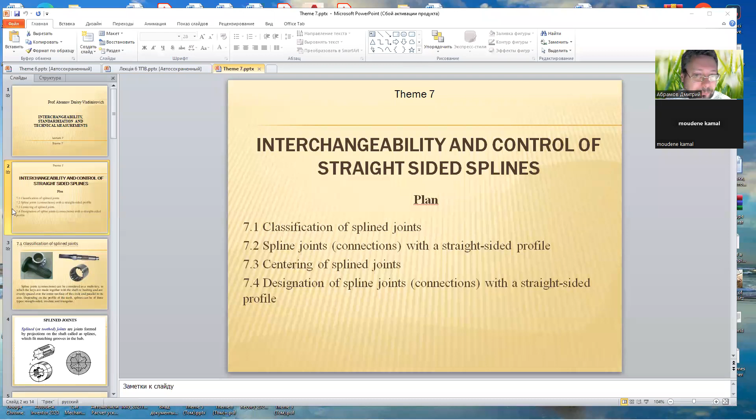Now we start item 7.1, classification of splined joints. What are splined joints? Spline joints or connections can be considered as multi-key connections in which the keys are made together with the shaft or bushing and are evenly spaced over the entire surface of the circle and parallel to its axis. Depending on the profile of the teeth, splines can be of three types: straight-sided, involute, and triangular.

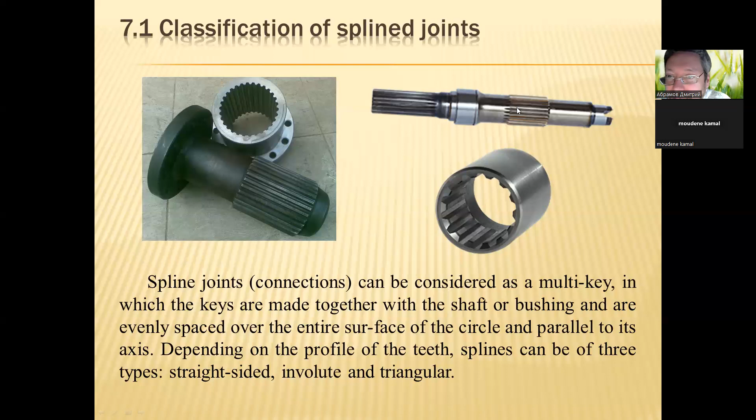In these figures, you can see the splines with straight-sided teeth. So, splined joints. Splined or toothed joints are joints formed by projections on the shaft called splines, which fit matching grooves in the hub. Please write down to your notes what the splined joints are. One more time, splined joints are joints formed by projections on the shaft called splines, which fit matching grooves in the hub. One, it's a shaft, and two, it's the hub.

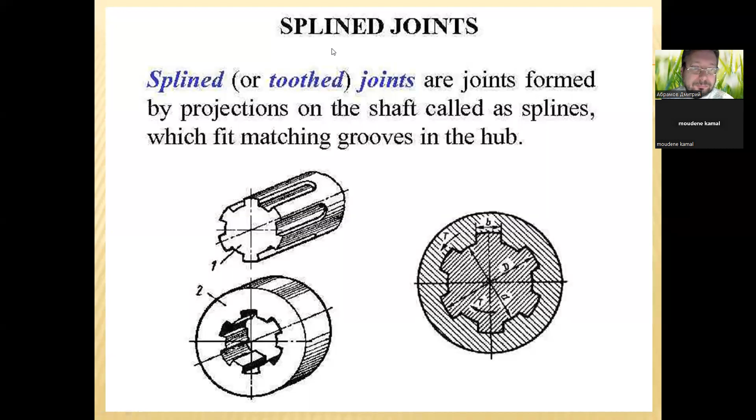Classification of splined joints according to the shape of splines. Joint with straight-sided splines. You can see this type in figure 1. Next type of splines is the joint with involute splines. You can see the teeth of these splines have an involute form, like a gear. And joint with triangular tooth splines. The teeth of the spline are like a triangle.

So write down to your notes these 3 types of splines, and write down to your notes 3 figures with different types of splines, of spline joints. And according to the depth and number of splines, the splines can be light series, medium series, and heavy series.

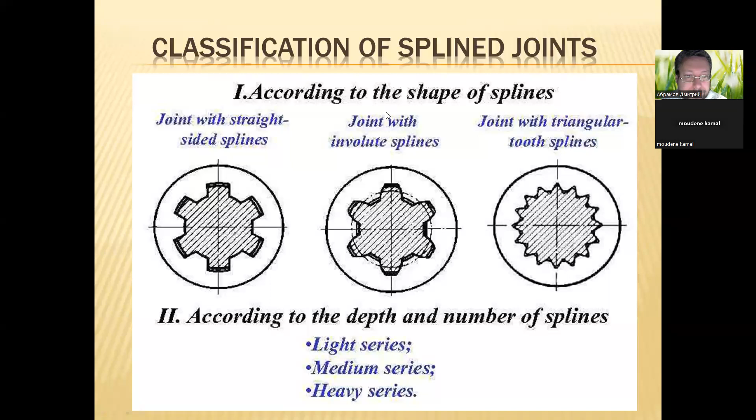Internal and external spline teeth. The tool machines and extensive hobbing and cutting tools available to us allow us to achieve external and internal spline connections according to the standards NBN, DIN, BS, AGMA, or NF on blanks, of which the dimensions fall within the limits of our manufacturing capabilities. This applies both to spline connections with involute flanks and to spline connections with straight flanks. You can see internal diameter of the spline connection, external diameter of the spline connection, and width of the tooth. Internal diameter is D1, external diameter D2, and width is B.

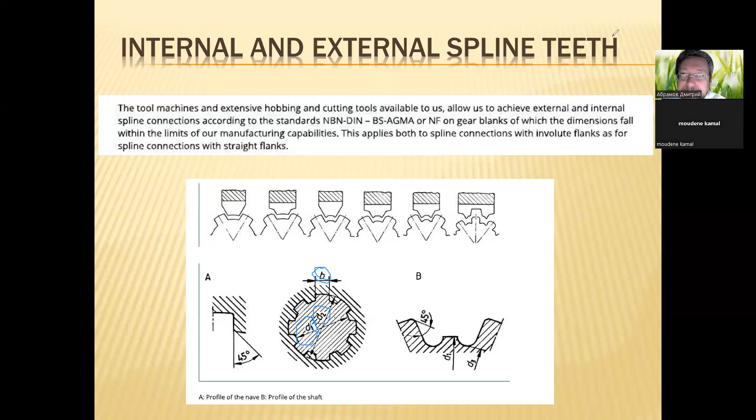Splined joints. Advantages. Splined joints offer a higher load carrying capacity owing to an increased contact area. They permit better alignment of the mating parts. Stress concentration is less pronounced at the roots of the splines than in keyways. Splined joints are easier to manufacture. They can be made to a higher degree of accuracy.

Please write down to your notes the advantages of splined joints. Splined joints compared to keyed ones transmit more torque, have greater endurance strength, and higher centering accuracy.

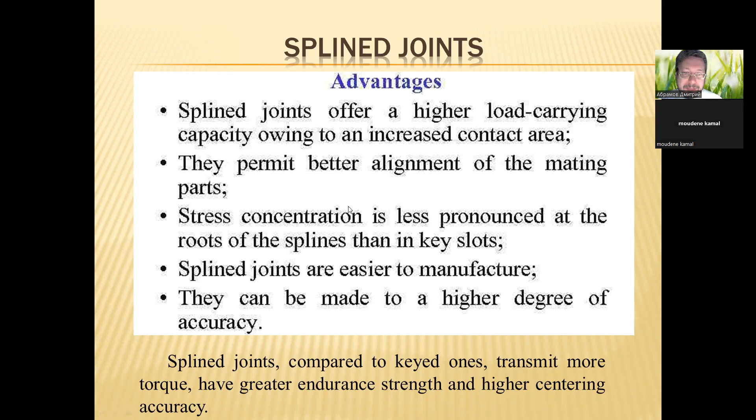Next slide. Yeah, another 1 minute, teacher, please. Okay, okay. Before we start the item number 7.2, let's watch some video about spline connections.

Splines are ridges or teeth on a drive shaft that mesh with grooves in a mating piece and transfer torque to it, maintaining the angular correspondence between them. For instance, a gear mounted on a shaft might use a male spline on the shaft that matches the female spline on the gear. The splines on the pictured drive shaft match with the female splines in the center of the clutch plate, while the smooth tip of the axle is supported in the pilot bearing in the flywheel. An alternative to splines is a keyway and key. though splines provide a longer fatigue life.

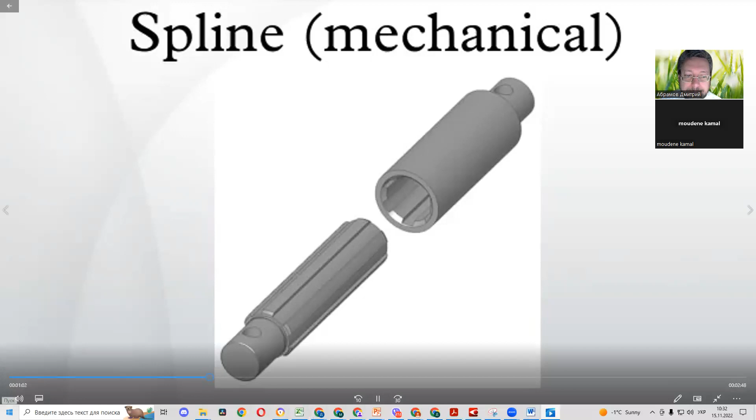Types. There are several types of splines. Parallel key spline, where the sides of the equally spaced grooves are parallel in both directions, radial and axial. Involute spline, where the sides of the equally spaced grooves are involute, as with an involute gear, but not as tall. The curves increase strength by decreasing stress concentration. Crown spline, where the sides of the equally spaced grooves are usually involute, but the male teeth are modified to allow for misalignment. Serrations, where the sides of the equally spaced grooves form a V.

These are used on small diameter shafts. Helical splines, where the equally spaced grooves form a helix about the shaft. The sides may be parallel or involute.

This can either minimize stress concentrations for a stationary joint under high load, or allow for rotary and linear motion between the parts. Ball splines, where the teeth of the outer part are implemented with a ball bearing to allow for free linear motion even under high torque.

Uses: Drive shafts on vehicles and power takeoffs use splines to transmit torque and rotation and allow for changes in length. Splines are used in several places on bicycles. The crank-arm to BB shaft interfaces that are splined include ISIS drive, Truvativ GXP and Howitzer, Shimano's Octalink, and many others, most of which are proprietary.

Some cranksets feature modular spiders, where torque is transmitted through splines. Cassettes engage the free hub via a spline that is one groove wider than the others to enforce a fixed orientation. Disc brake mounting interfaces that are splined include Centerlock, by Shimano.

Aircraft engines may have a spline upon which mounts the propeller. There may be a master spline which is wider than the others, so that the propeller may go on at only one orientation, to maintain dynamic balance. This arrangement is commonly found in larger engines, whereas smaller engines typically use a pattern of threaded fasteners instead.

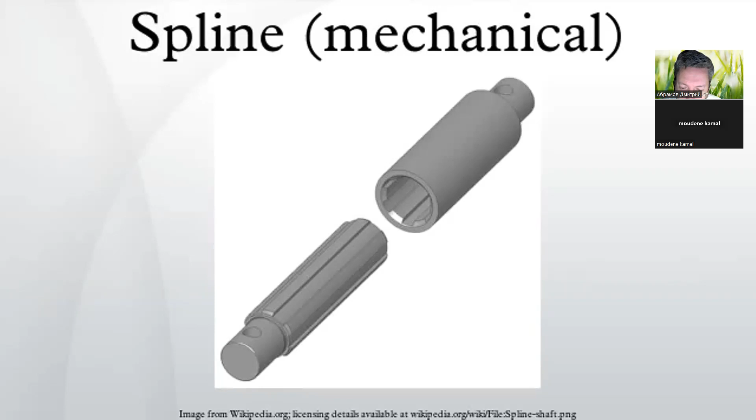References. Further reading: Robert Rich Robbins, Tooth Engagement Evaluation of Involute Spline Couplings, Brigham Young University. Retrieved July 8, 2010.

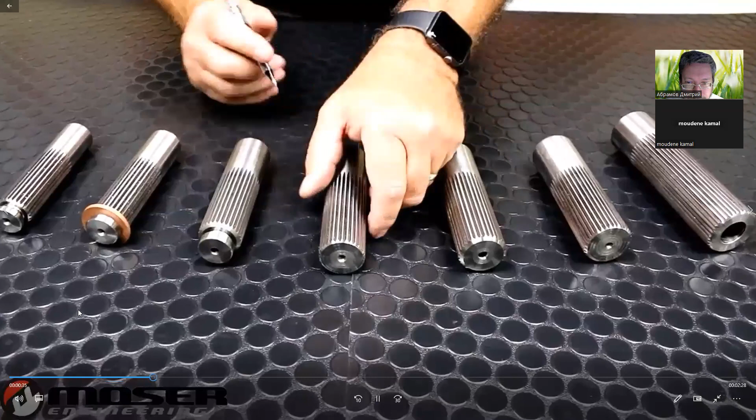When we ask you what your spline count is, what we want you to do is count the number of peaks on the axle. Here in front of me, we have some of our most popular axle splines, starting with the 26 spline C-clip axle and progressing all the way up to our 40 spline race axles.

This is our 26 spline OEM replacement axle. It measures just over 1 inch in diameter. This is our 40 spline, which measures just over 1 3/4 inch diameter. When you have more power, you need more spline.

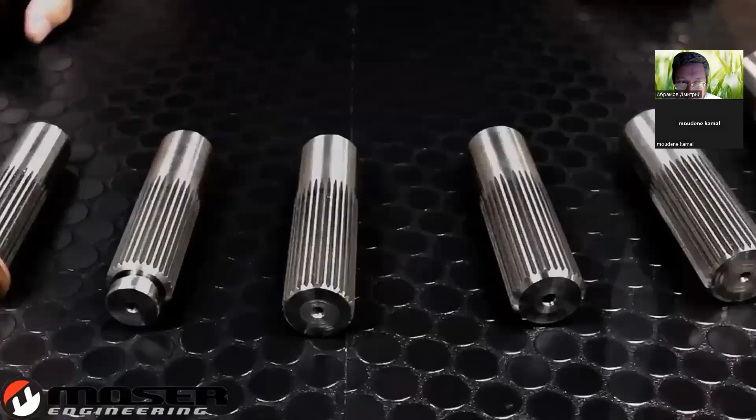Another question we often get is, when I replace my OEM axles with a Moser axle, how much strength am I going to obtain? Well, the Moser axle, comparatively speaking, spline to spline, is approximately 30% stronger than your OEM axle.

This is one of our C-clip axles. Typically, these are found in OEM type vehicles, including GM 10 and 12 bolts and Ford 8.8s. They serve the OEM industry well and provide adequate support for these types of vehicles. However, when you start making more horsepower and put them in a racing environment, you need more strength than a C-clip axle can handle.

Once you get to that point, Moser recommends a bolt-in style axle. It is far safer than your OEM style C-clip axle. If you have a problem in the differential or with the axle spline breaking, you don't want the axle exiting the vehicle.

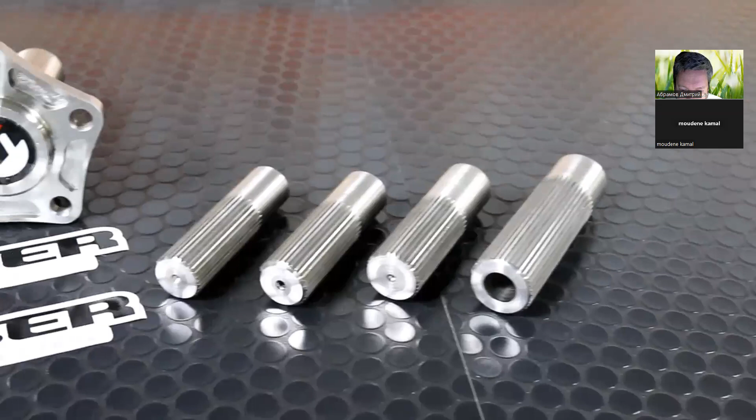We're often asked, what is a contingency paying axle? We recognize 31 spline or above, or the equivalent of 1.285 inch diameter axles that are also positive retention. But in order to qualify for any money, you have to run 12-inch decals on both sides of the vehicles, along with the Moser end cap visible at the time of the race.

We offer a 10-year warranty on all 33 spline and larger positive retention axles in a drag racing environment. In order to qualify for a warranty, it must be on an asphalt or concrete type racing surface.

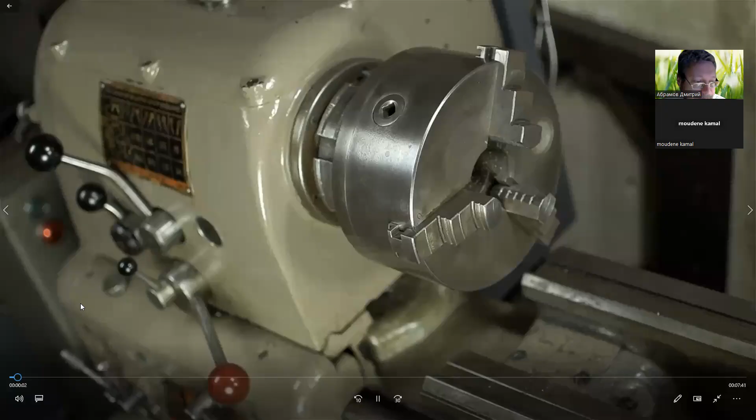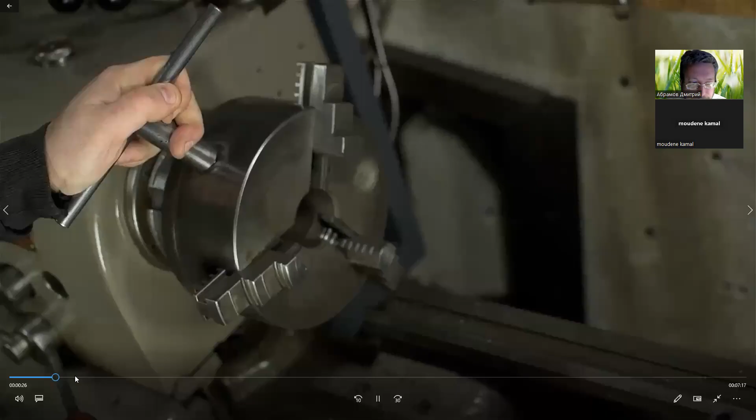Quick video today, I hope. The cousin of a friend of an acquaintance of a complete stranger, who evidently doesn't care to have a real machinist do this right, asked if I could machine a PTO adapter, specifically just the male PTO features, which fundamentally is a standardized spline.

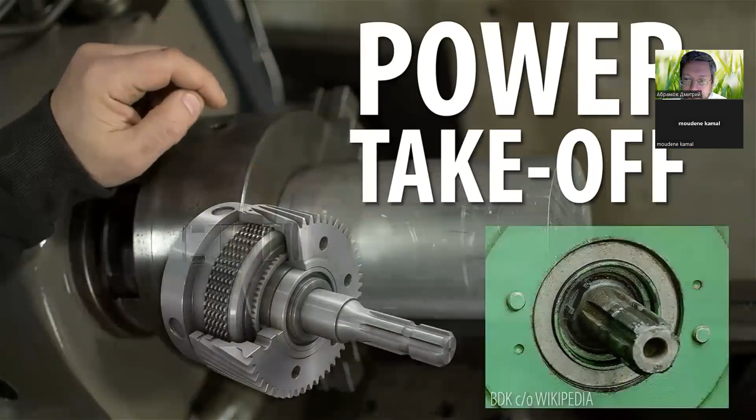In this case, a standard 1-inch 6-spline fitting with parallel sides. PTO stands for power takeoff. You may have seen these things sticking out the sides of farm and garden equipment. They're like electrical outlets, but for mechanical power. You'd plug other stuff you want to power onto them, like log splitters or mowing attachments, that sort of thing.

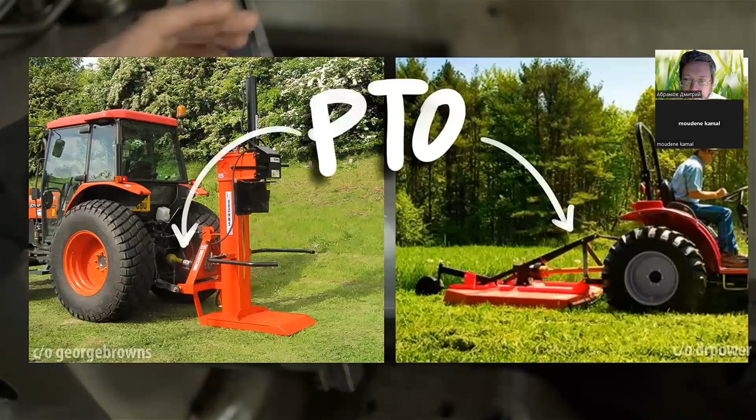I've never cut one of these before. And after learning that it's some sort of hack backyard project, and more importantly, no one can get hurt here except their wallet, I said, what the heck?

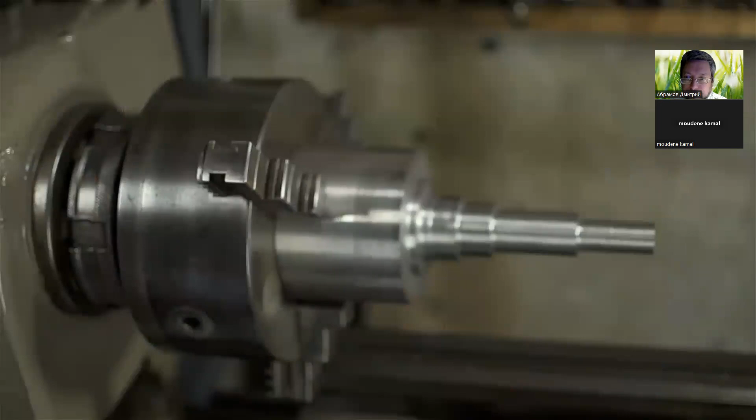First thing I had to do was find information on the 1-inch 6-spline PTO shaft. Of course, I turned to the machinery's handbook. Fortunately, this thing has all the information I'll need to pull this off. And since I'm only responsible for the actual spline, we'll knock this back down and take it over to the mill. You likely saw this coming, but I'm set up in the dividing head.

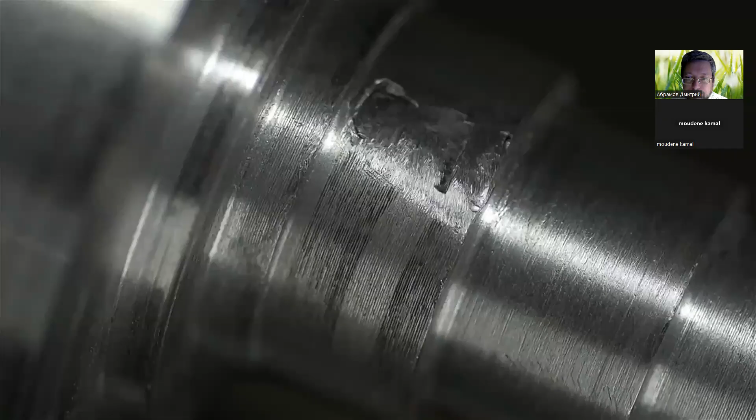I didn't make this part. This is as received. The owner, from what I understand, has a lathe and a welder, and on close inspection, probably also an angle grinder. That, or more than likely, they tried to test fit this on a bearing or whatever this attaches to. Best I could do is get this thing centered to within about 1.5 thou.

That's total run out. After 20 minutes, I've given up and I'm calling that close enough. According to the good book, if I do the rest of this right, I should still be in tolerance. That and their finished OD, where the spline goes, is a bit undersized.

Let's pontificate a moment, shall we? Without being a complete and utter jerk about it, of course. Here's what I think happened.

They held onto this part here, same place I'm grabbing it with my dividing head. Probably obvious enough, right? And turned down the features that they needed. The 1.5 thou I'm seeing now is from their 3-jaw chuck. I mean, maybe a little is coming from this 3-jaw too, but I bet most of that was just their chuck and working off the OD of raw stock, which is fine.

They also took a skim cut here on the large diameter, and if we could cut the back of this part off, we could grab that and be in a better situation, concentrically speaking. But they either went to town on this and took their measurements hot, or they used an older, worn PTO to figure out what the dimension should be. In either case, our major diameter is now undersized.

What does that all boil down to? Well, I'm not going to volunteer for the extra work to get this thing dead nuts, or in metric, spot on. I agreed to do this for a couple of reasons, and on the premise that I might not be able to pull it off.

First, like I said, I've never done anything like this before. I've never cut a PTO spline. And second, I don't have the right cutter to do it. All I have is a regular milling cutter. And I'm curious to know if I could approximate the PTO spline using one of these.

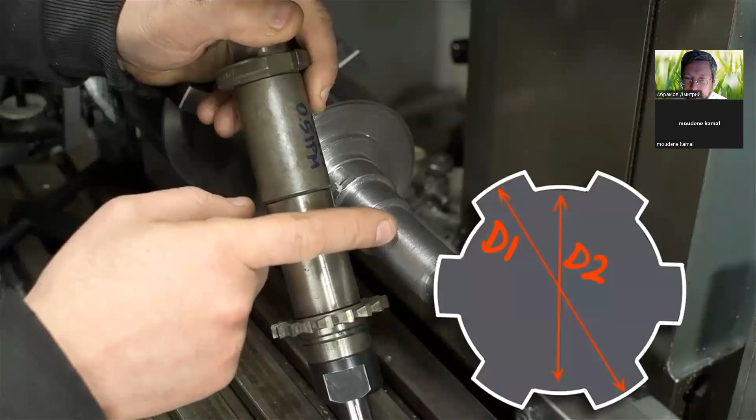These splines have a minor diameter. That means in between the splines, it's round. And technically, I would need a form cutter of the right size to do this, something that in one pass would leave a finished spline profile. This cutter is going to leave that minor diameter a bit faceted, I guess, depending how much I approximate it. Hopefully that'll make more sense as I work through this, if this works at all.

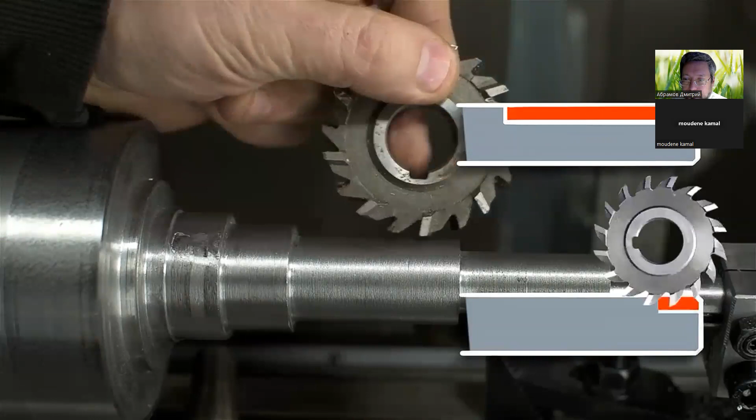You might be wondering why I'm not using just a regular end mill for this, and that's good—I briefly considered the same thing. Using a regular end mill to cut the splines would result in an abrupt end to that feature, like where it stopped, it would look like a key seat in a shaft, just like a sharp inside 90-degree corner. I couldn't find anything specifically in the book, and I didn't dig too hard, but PTO shafts usually have that cut feature taper out. So if I come in here with a milling cutter and do the same groove, that cut will feather out. It won't stop abruptly. I don't know if that's necessary, if it's done to reduce stress concentrations, or if it's just a result of the manufacturing process. In either case, I'd like to mimic that lead out on the spline cut, so I'm going to use one of these.

Somehow, all of a sudden, it's the next day. Time flies when you're having fun.

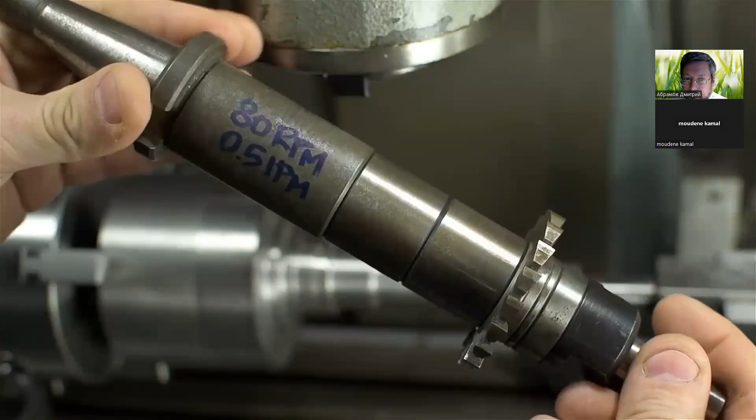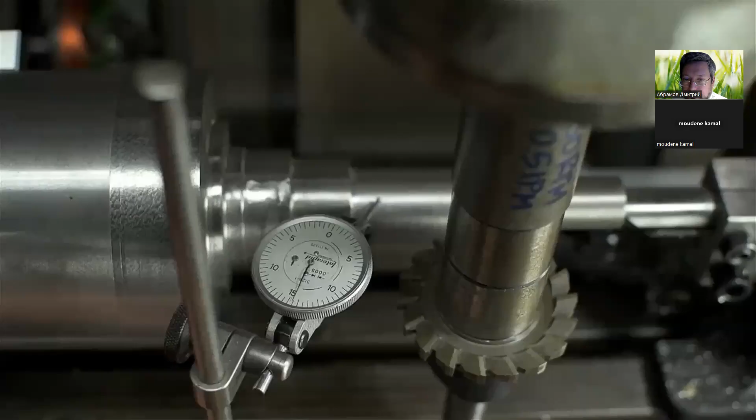Got the milling cutter mounted on my mandrel, running 80 RPM at 0.5 inches per minute, about 12 to 13 millimeters per minute—a bit perhaps on the conservative side, but this looks to me like a reground cutter. I've never used it. It feels sharp, but I don't know how well it's going to do, so I'm going to start off slow and see how it works. I've snuck in behind here to pick up the height of the workpiece, the top of the workpiece, and I'm going to use that to set the height of the cutter.

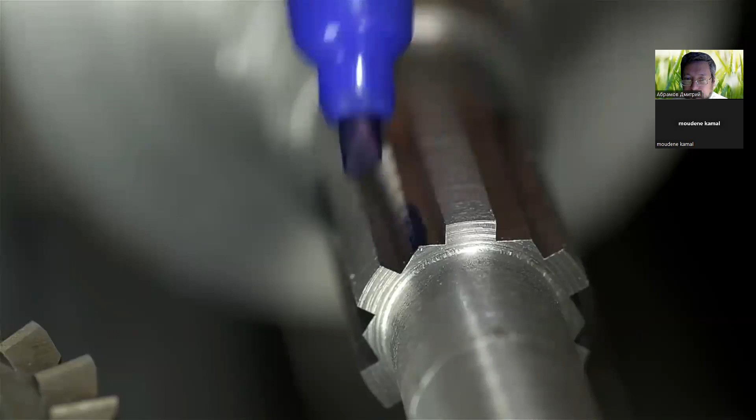And this is what I end up with after 12 passes. I did 6 cuts on one side of the spline and then 6 on the other. It's left me with these little pyramids here—that's the faceting I was talking about earlier. I'm now going to come in with 6 more cuts and try to knock those out. We'll see how that looks and take it from there.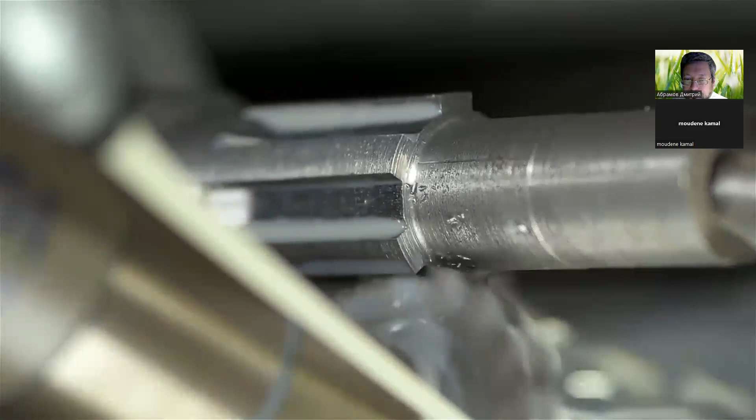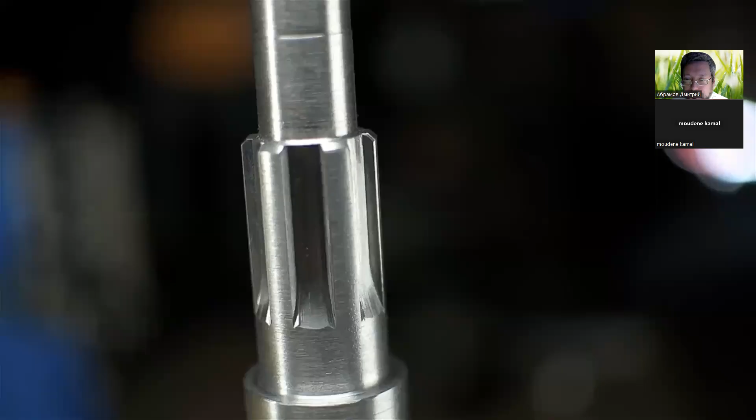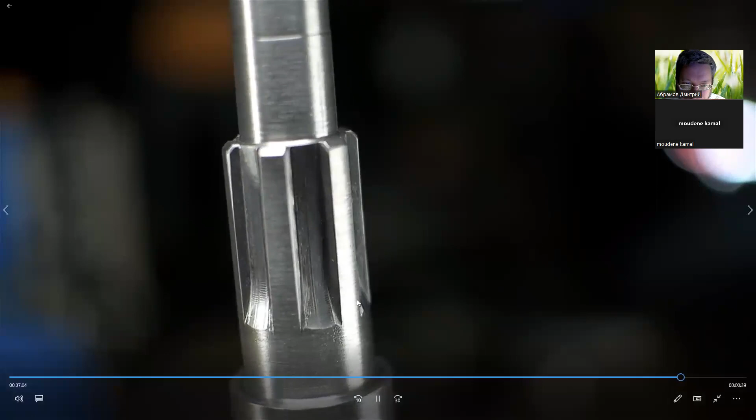And there it is. It's probably not going to end up on the cover of National Geographic, but according to the numbers, this thing should work. I did my best to get in there and deburr it with a couple of small files and a stone. I didn't do an exceptional job—you can see some scuff marks here and there. I'll probably hit this with a little bit of Scotch-Brite or a wire wheel or something just to make it look a little more uniform. But as is, there aren't any sharp corners, so no one should get their hands torn up on it. Lessons learned? Well, just like most things in machining, the first time is always fun. But if you had...

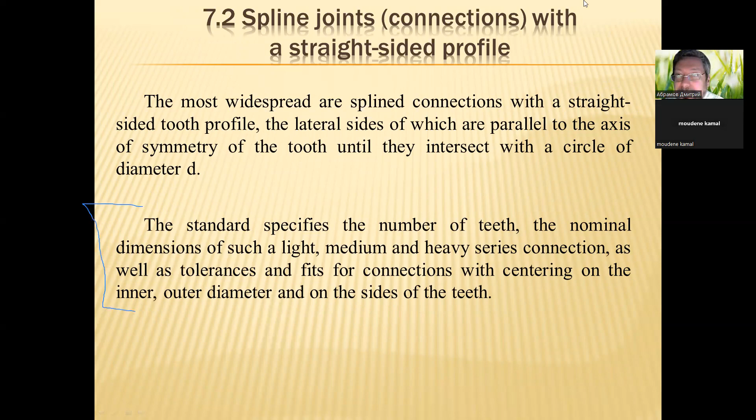It was the second method of centering of splined joints.

The third method of centering of splined joints: centering on the side surfaces of the teeth, B, side surfaces of the teeth.

This is used in cases where the centering accuracy is not of particular importance, but it is required to ensure sufficient strength of the connection in operation with alternating loads, high torque use, etc. With this variant of centering, the load is more evenly distributed between the teeth. However, centering details are less accurate.

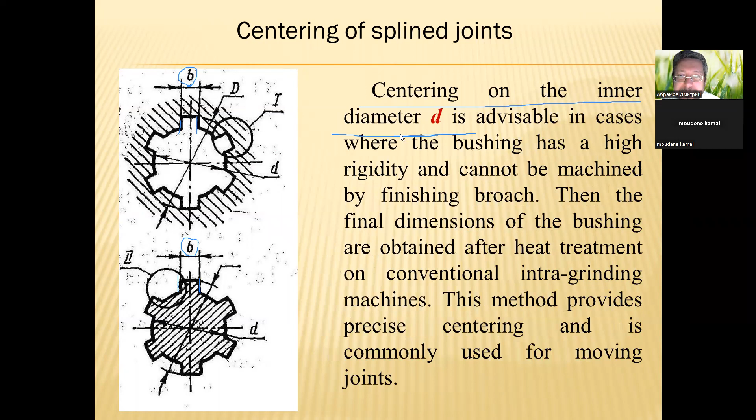So you should write down to your notes the 3 types of centering of splined joints: centering on the side surfaces of the teeth, centering on the inner diameter, small d, and outside diameter centering, big D.

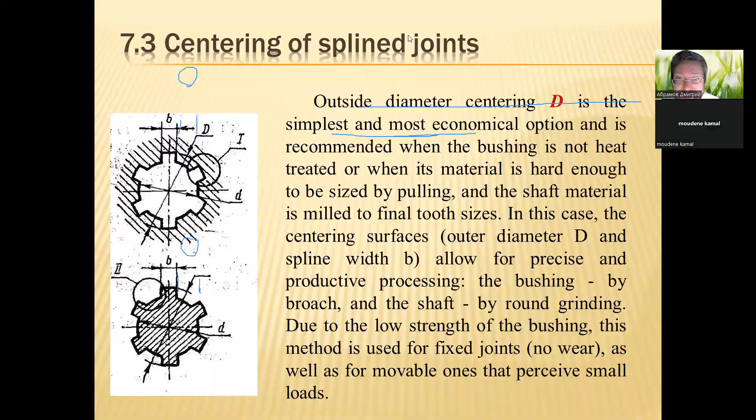Recommended fits in splined joints. The standard establishes recommended fits on spline dimensions depending on the centering method.

20 tolerance fields have been established for the centering surfaces of the shafts of grades from 5 to 10, with the fundamental deviations D, E, F, G, H for the formation of clearance fits, as well as Js, K, N for transitional fits.

For non-centering surfaces, it is established when centering on the inner diameter d. For the outer diameter on the shaft, the tolerance field is A11. For the outer diameter of the bushing, H12, big H.

When centering on the outer diameter, big D, for the inner diameter, the tolerance field H11 is set for the bushing, and for the shaft, the tolerance field is not standardized.

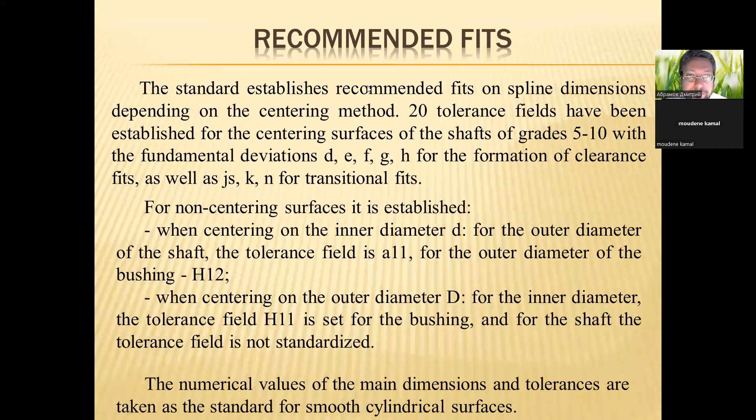The designation of splined joints and their parts includes the method of centering, the size of its main parts and their fits.

The method of centering, in the first place, is centering by inner diameter. The number of teeth, 8 teeth. Its internal diameter, nominal size of internal diameter, small d, its outer diameter, nominal size of outer diameter, big D, and nominal size of width of teeth, B.

Nominal size of B, and their fits on the inner diameter, fits on the outer diameter, and fits of the parameter B.